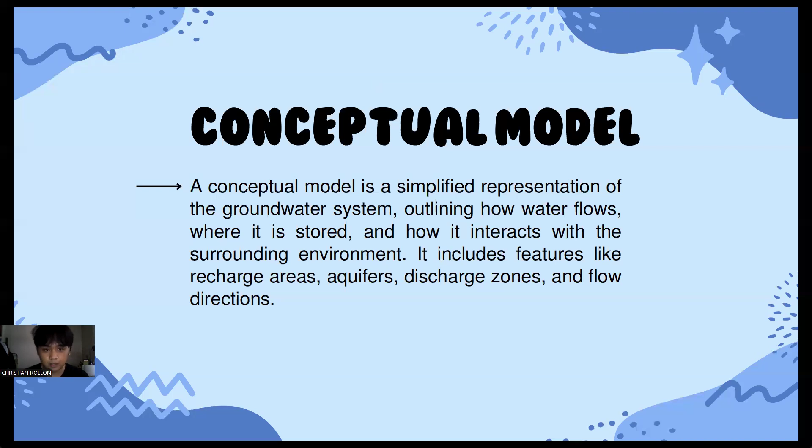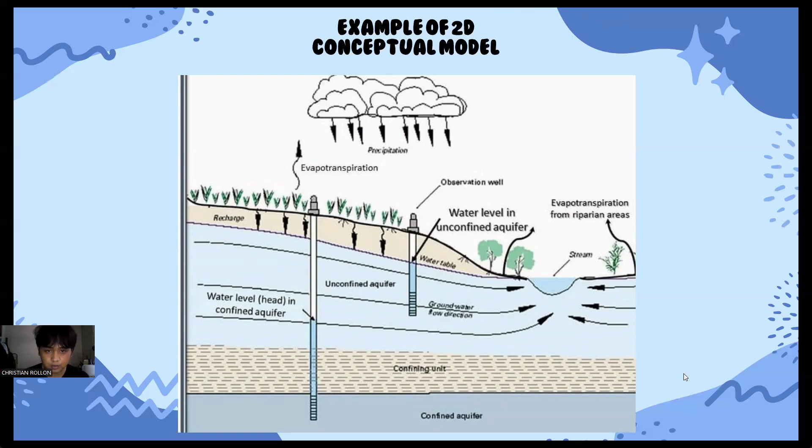Selection of code. Choosing the appropriate software or numerical code to simulate groundwater flow and related processes. Popular codes include software like MODFLOW and MT3DMS. So, MODFLOW is for flow and MT3DMS is for contaminant transport. So, para mas masabta, no?

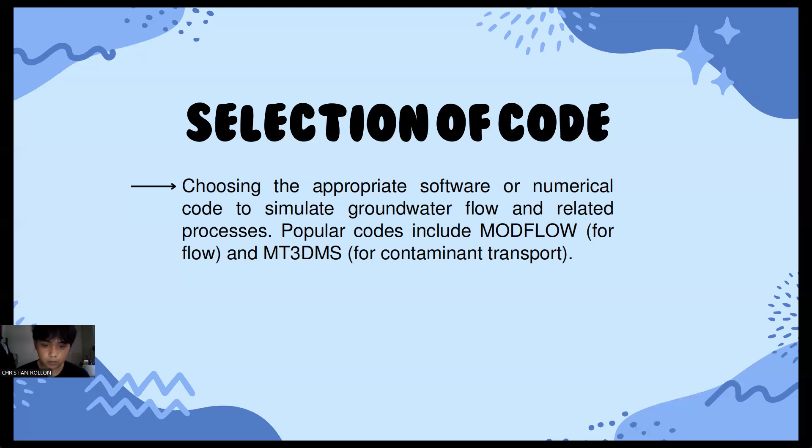So, ang difference ni MODFLOW and MT3DMS is MODFLOW is groundwater modeling software. So it focuses on movement of the water. And MT3DMS focuses on the movement and behavior of dissolved contaminants within that flow. So ang MT3DMS is kauban na siya ni MODFLOW para maghimo og groundwater model. So let's proceed for the next topic.

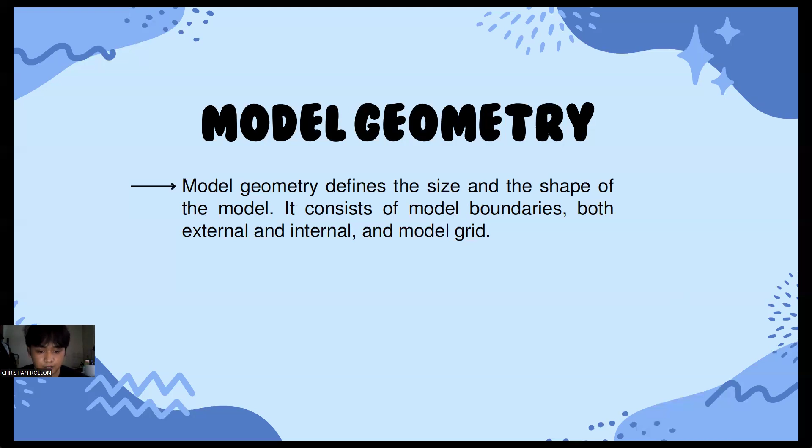Model geometry. So model geometry defines the size and the shape of the model. It consists of the model boundaries, both external and internal, and model grid. So as you can see, masabtan man din siya diri class, no? Na ang model geometry kay it defines the size and the shape of the model. So ang purpose niya is to define the structure of the area that is being studied. So let's proceed to the next one.

So the next one is grid. Grid is to divide the model into cells for accurate calculations. So when you say grid, gina-represent niya ang model area and to solve the equations for each cell. So ang purpose niya is to help represent variations in properties like permeability and recharge, apply boundary conditions, and simulate groundwater flow and contaminant movement. So here are two types of grid, finite difference grid and finite element grid. So let's proceed to the next one.

Boundary array cell type. So there are three types of cell types sa boundary array. Part pa na siya sa grid class, which is active cell, inactive cell, and constant head cell. So when we say cell sa grid, kabalo naman mo, parallel lines na makabuo siya og square. Mao to siya ang grid cell. So let's start with active cell.

So ang active cell nag-represent siya sa areas where groundwater flow and transport occur and calculations are performed. So inactive cell is to represent areas outside the model domain, such as impermeable zones like bedrock, where no calculations are done. So the last one is constant head cell, representing the fixed boundary conditions where the water level remains constant, simulating features like lakes or controlled aquifers.

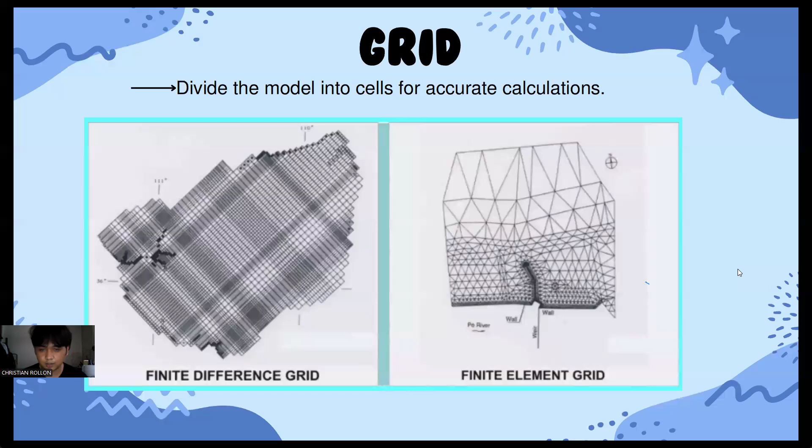Ilang class. Kasi isang ano, wait, proceed na lang class.

So, the next one is model parameters. It consists of hydraulic conductivity, transmissivity, and effective porosity. So, explain ako sila. Hydraulic conductivity is the most critical modeling parameter, controls how easily water flows through the ground, and transmissivity and the storage coefficient, should be realistic and ideally based on pumping tests.

So, ang hydraulic conductivity, ang purpose niya is to help na ma-determine mo ang rate of groundwater movement through soil and rocks. And ang transmissivity, it quantifies the rate of groundwater or the total water flow capacity of an aquifer.

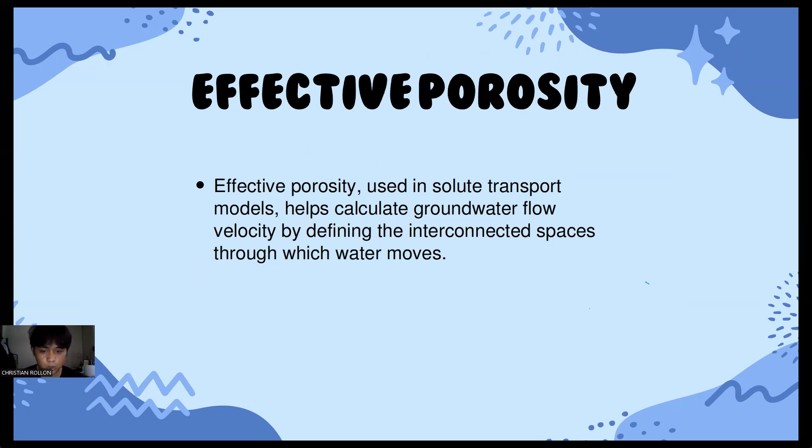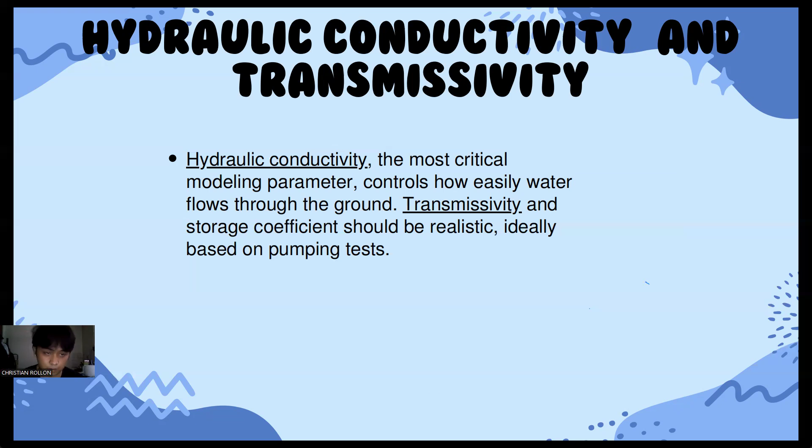So, ang next one is porosity or effective porosity. It is used in solute transport models and helps calculate groundwater flow velocity by defining the interconnected pores through which water moves. So, ang purpose niya is to indicate how much groundwater an aquifer can hold. Murag same na sila, no? Pero ang kalahian niya sa transmissivity is, ang transmissivity nag-focus siya sa total water flow capacity of an aquifer sa specific area lang. So, proceed na ta sa next one class.

Initial conditions. Explain naman ako ng active cell and constant head cell. So, cells where groundwater flow is simulated set the hydraulic head higher than the cell bottom to ensure flow occurs. So, mao na siya ang active cells initial condition. And constant head cells, boundary cells with fixed hydraulic head values used to define external conditions and control the flow into or out of the model.

So, mas ma-define mo kung asa mag-flow in or magsulod ang water o asa siya nagagawas. Mao na siya ang constant head cell. Wala na nako gi-include diri ang inactive cell class kay there are no calculations involved, murag dili na siya necessary.

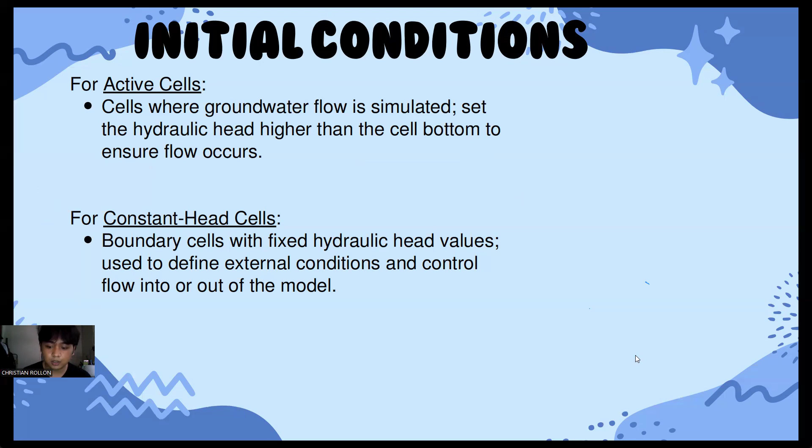So, let's proceed to the last topic, stresses. There are four types of stress sa groundwater modeling: pumping stress, recharge stress, geological stress, and boundary stress. So, let's start with pumping stress. The removal of groundwater from wells. When we say wells, it is human-made structures or katong hole nga ginadig sa ilalom class para maka-access ka og water nga gikan sa aquifers na na-store, which lowers the water table or potentiometric surface and affects flow patterns.

And recharge stress. The addition of water to the aquifer through precipitation or surface water infiltration, increasing groundwater levels.

Wait lang class. Sorry class.

Napindot. So let's continue. Sa geological stress, changes in subsurface conditions, for example, faults, fractures, or what do you call this? Ano class? Compaction. That can alter groundwater flow paths and storage. So for boundary stress, the influence of boundary conditions like rivers, lakes, or impermeable layers on the movement and distribution of groundwater.

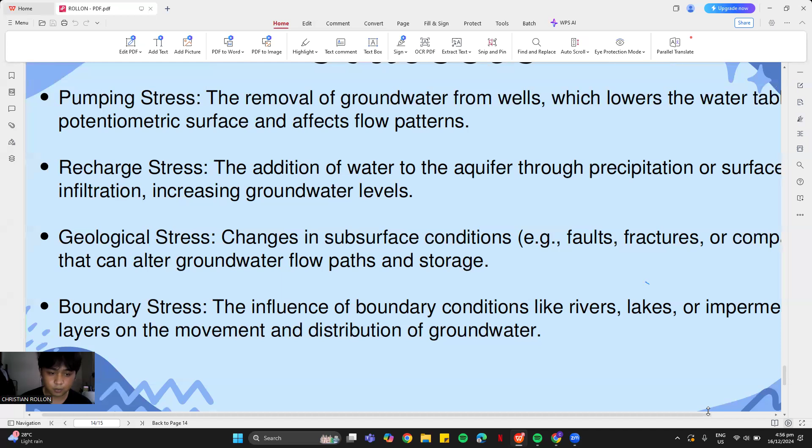So ang difference aning pumping stress, geological stress, recharge stress, and boundary stress is, ang pumping stress ang naga-cause sa iya is groundwater extraction, which lowers the water table and it can alter the flows of groundwater. And for recharge stress, nag-result ana niya is water addition such as rainfall or infiltration. It adds water or ma-rise up ang water level, which naka-cause siya og stress gyapon.

And geological stress, ang nag-trigger siya is subsurface issues such as faults, fractures, and compaction, gi-ingon nako kanina. And boundary stress, ang nag-cause siya is external boundaries, not internal. So, for example, rivers and lakes, and it could also dictate the flow of the water or the water movement. And that's all, class. Thank you.